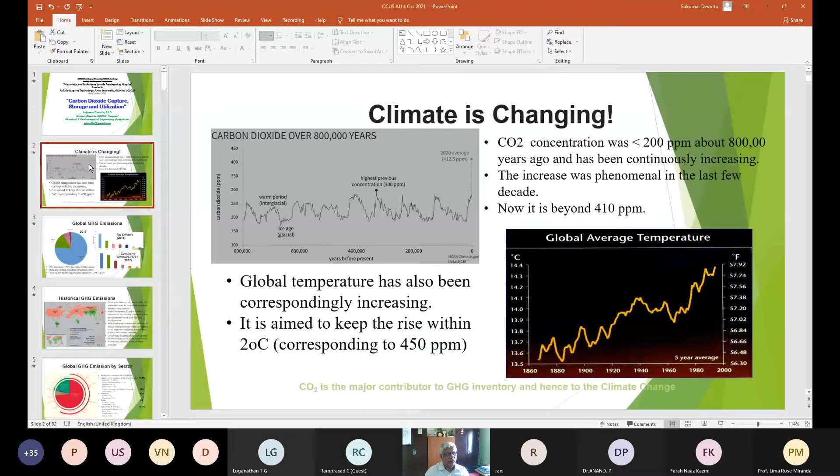Why I chose to speak on carbon dioxide is mainly because of climate change. The climate has been changing in recent times, and people have been wondering what is the reason. If you look at this graph, the carbon dioxide concentration over a few hundreds of thousands of years has been below 300 ppm. But in recent decades, it has been going up. Now it is almost 412 ppm.

People have also measured global average temperature over the decades, and found that the carbon dioxide increase corresponds to the global average temperature. Therefore they have concluded that carbon dioxide is the major reason for the increase in global warming. The world is now struggling to find out how to keep the carbon dioxide rise down so that temperature rise can be kept within 2 degrees Celsius.

If you look at global greenhouse gases, the idea was that carbon dioxide is one of the greenhouse gases, but there are many greenhouse gases. Six of them are the most prominent ones, and they were covered under the Kyoto Protocol: CO2, methane, nitrous oxide, HFC, PFC, and SF6 - that is hydrofluorocarbon, perfluorocarbon, and sulfur hexafluoride.

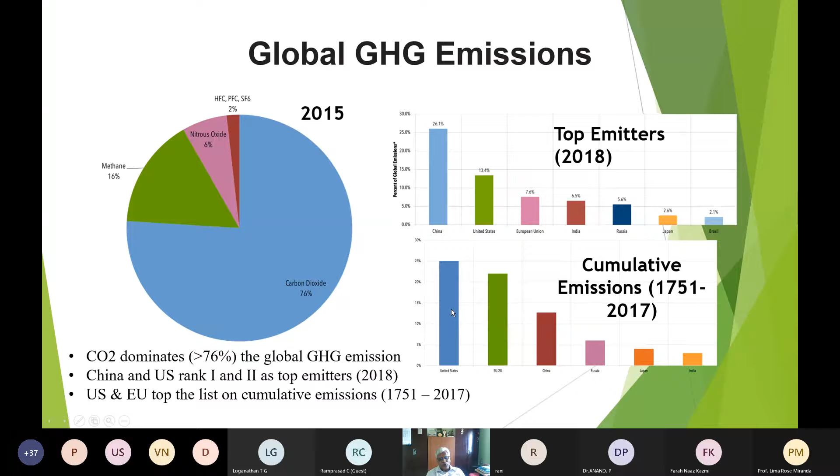But if you take current emission, we are fourth, and China is the leader. So there's a lot of controversy - everybody is saying India and China should reduce emissions, but they are saying, look, we are developing and we should be allowed to emit. This is another plot of global GHG emission, and you can see these are the large emitters who have already developed, while we are developing, and therefore we are arguing that we should be allowed to use the existing carbon space to develop.

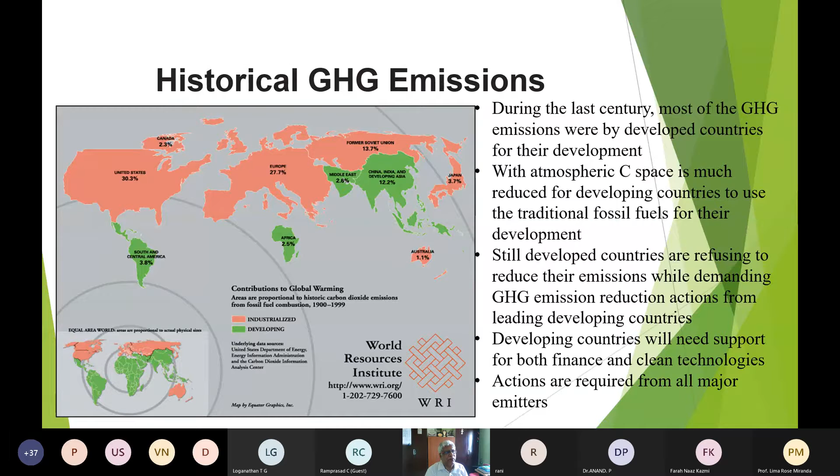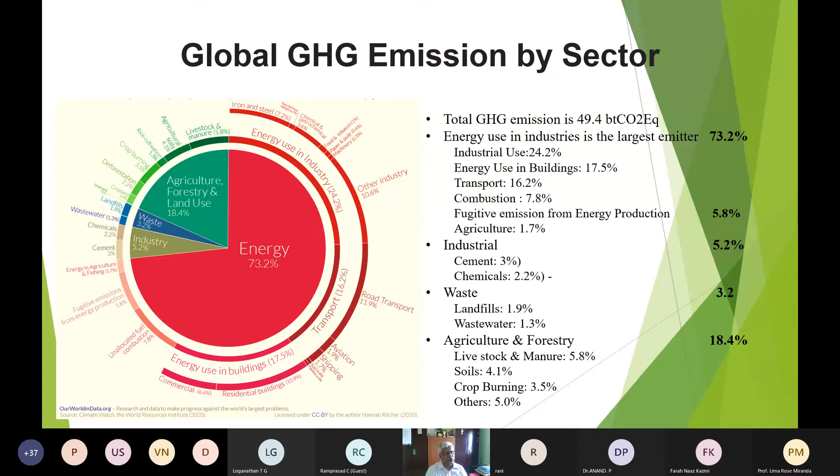And if you look at the sectoral emissions, energy is the major emitter. GHG is emitted mostly by industrial activities, but also agriculture and forestry. Energy use dominates the GHG emission, followed by others, but nothing compares to energy - production, transport, combustion, all come under it. So people are targeting energy and CO2.

There is a Paris Agreement which said we need to act fast because global warming is becoming a very large issue, and if we don't act fast, we will reach a point of no return - meaning we can't save the world, it will become too catastrophic to save. Today, all the rains, floods, droughts that happen are attributed to this climate change, basically CO2. Therefore the world is struggling - can we at least keep the rise to 1.5 degrees Celsius, so that by 2050, if we can reach that target, we can save the world from catastrophic disasters.

The IPCC, of which I was a member, said all these things—that there will be huge floods, because annual rainfall cumulative will be more or less the same, but it will happen in peaks. That means there will be downpour, which we are witnessing. Everywhere downpour is there, landslides are happening because of this.

Therefore, they said we need not just reduce CO2 emission, we have to capture it also, and use it or store it. So this is where capture becomes important.

As I told you, if you take any world energy resource, fossil fuel becomes the major energy resource. You can have electricity, solar, wind, but they still do not form a major contributor to energy. We are increasing its use, but we are still far behind. Oil, coal, gas, all these things are dominating our energy resources, and still, in spite of our best effort, coal dominates. Fossil fuels dominate, and power generation dominates.

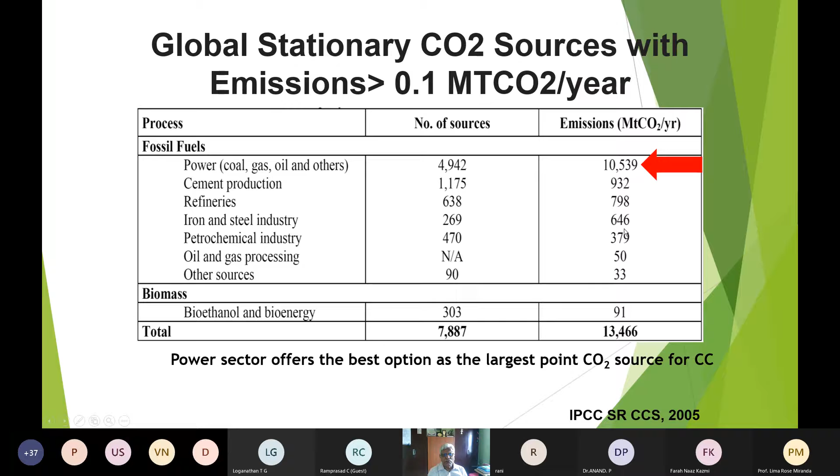So where does the CO2 come from? Mainly, if you look at the table, it's coming from power generation—coal, gas, oil. The emission, 10,000 million tons of CO2, comes from power generation. The rest—cement, refineries, iron and steel, gas processing—they all contribute, but they are all much smaller compared to power.

And if you look at the properties of CO2, it is non-toxic, non-flammable, freely available in the atmosphere, but it's a major contributor to global warming. CO2 is also used as a feedstock for chemicals, to make fuels and other materials.

Therefore, scientists are now looking at whether they can increase the use of CO2 to make value-added products through novel routes, so that CO2 emission can be reduced. But even if you use all major chemicals utilizing CO2, it's not going to make such a big dent in CO2 emission. Therefore, CCS has the highest potential—this is the opinion of some of the best experts in the world, including IPCC.

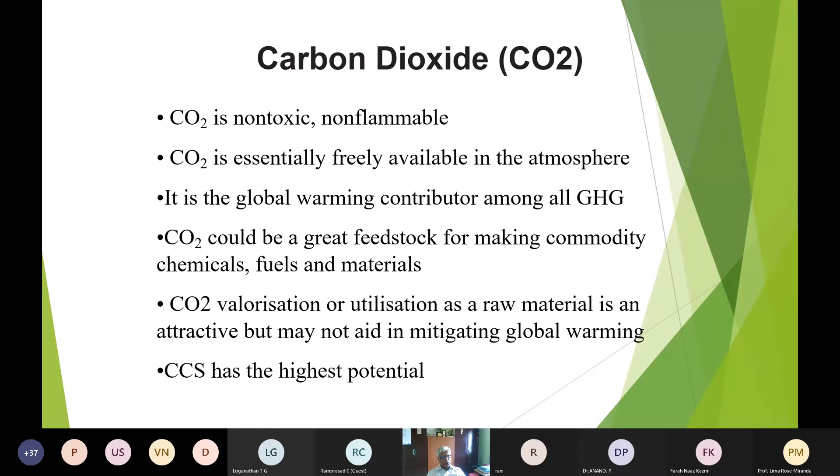So that's where CCS started—carbon capture and sequestration. When I say CCS, I mean carbon capture and storage. When I say CCU, I mean carbon capture and utilization or valorization. CCS became a big topic about 20-30 years ago.

Now scientists believe that CO2 emission is mainly from man-made efforts—they are responsible, it doesn't come much from nature. Like methane comes quite a lot from nature, but CO2 very little.

There are many aspects of CO2 rise which I will not talk about, but I can tell you ocean acidification is one, because the major sink for CO2 is the ocean. With the increase in CO2 concentration, the ocean is absorbing more, and in the process it is becoming acidic because CO2 is acidic. The water is also getting warmer, so it's desorbing more CO2. So there is a process of absorption and desorption—this is very dynamic, depending on where you are, which ocean and things like that.

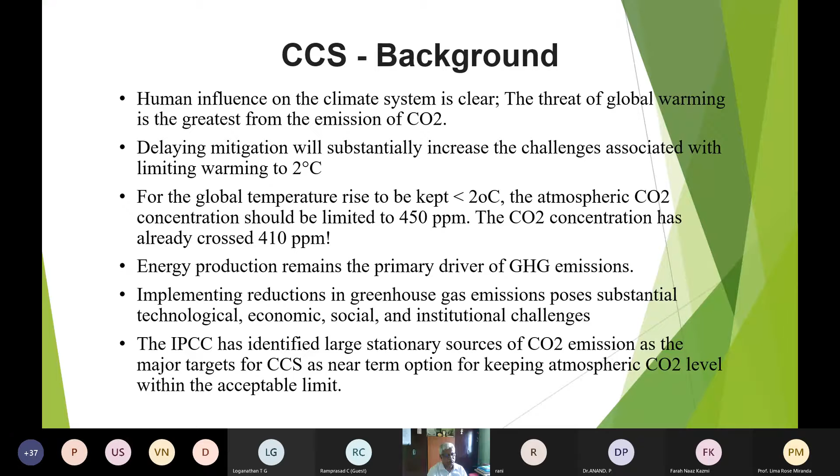But still, it is trying to—if it reaches 450 ppm in the atmosphere, people think that's a point of inflection, meaning we won't be able to stop catastrophe. So IPCC identified CCS as the major approach.

Then, where does India stand on CO2? India also relies mostly on coal for power generation—54% of our power plants are thermal power plants based on coal. So we cannot suddenly shift. That's why today we have a lot of emphasis on solar and wind.

We are expanding—from nowhere we have gone to 11% on solar, 10% on wind, and 12% on hydro, and nuclear is still a small percentage, but it is going on. What is important is coal is the major dominant energy source for India, and it will continue so because we have coal. One of the problems with our coal is high ash content, so thermal power efficiency is rather low.

Otherwise, it's abundantly available for us for next few decades and will continue. But there is a lot of pressure on India to reduce its carbon footprint, and therefore we think that we need to do something about CCS to decarbonize the Indian economy.

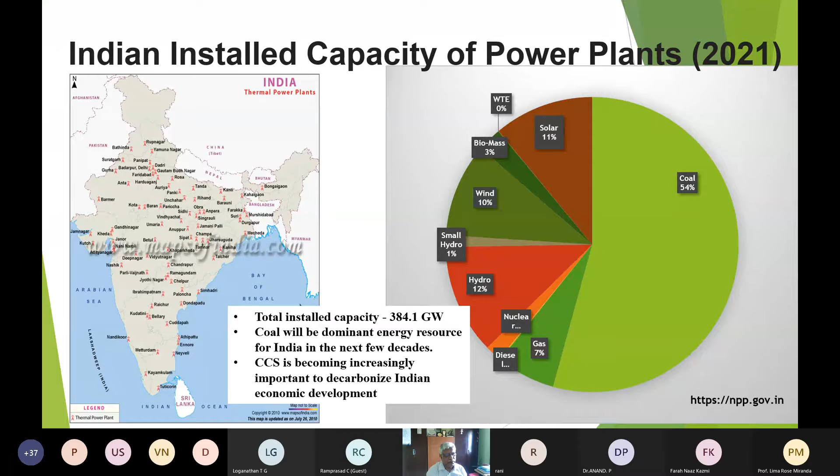Decarbonize means for economy to grow, you will require power. When you need power and you use coal, it becomes too much dependent on carbon dioxide. So the economic growth will be proportional to CO2 emission. So to decarbonize means we need to reduce CO2 carbon coal dependency for our economic growth. That's what we mean by decarbonizing economy.

So carbon capture. What are the options available for carbon capture? Direct air capture - you can capture from air because air contains 412 ppm of carbon dioxide. You can capture using certain adsorption material, adsorbent. But then once you have adsorbed it, you have to desorb it, so you have to use some thermal energy to desorb.

So is it carbon negative? Let me explain what is carbon negative. When you capture 1 kilogram of CO2, if to release this CO2 you have to again use something which will generate 1 kilogram of CO2, your net CO2 captured is 0. Because you have captured 1 kg, but to desorb it, you have released 1 kilogram of CO2. That means what captured is useless. So carbon negative means I should be able to capture 1 kilogram of CO2 and desorb it, and the net should be less than 1 kilogram. Ideally, it should be much less than 1 kilogram, so that I capture and avoid emission, mitigate emission.

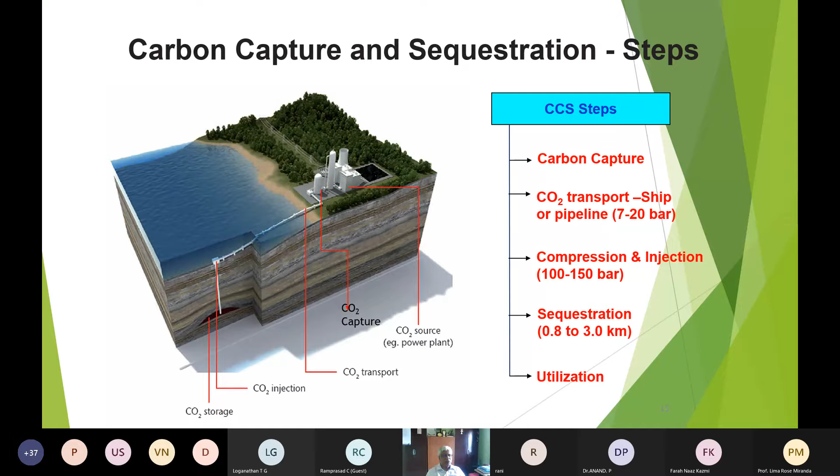There are two ways of looking at CCS: geological and offshore. Geological is terrestrial - you capture it from the plant and send it to different levels, either to a deep saline formation or inject it into enhanced coal bed methane, which is at a reasonable level. Your coal seams are here, and you inject CO2, and CO2 gets adsorbed while methane gets desorbed. So you get enhanced recovery from coal bed methane, which we call enhanced coal bed methane recovery.

Then you have CO2 for oil recovery. When you have oil wells, some oil gets trapped in pores. If you're a chemical engineer, you understand that pores retain oil, and you cannot easily extract it - you have to apply a lot of vacuum to extract oil from pores, and that is a very expensive process. Generally, it's done by injecting water or nitrogen to push the oil trapped in the pores.

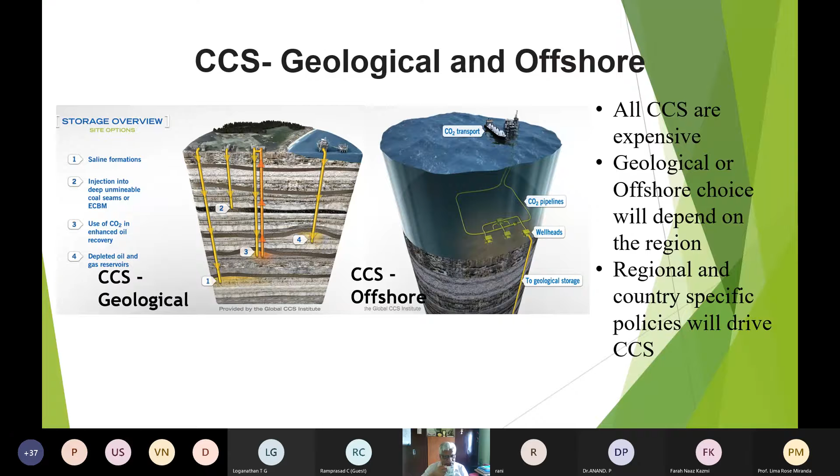So this is geological storage, which I mentioned - you have oil shale, so you can capture CO2, pump it, and then get either enhanced methane or oil. These things have been practiced for quite some time, and there are now quite a few studies being made. In India, we are mostly concentrating on oil recovery and coal bed methane recovery.

But I can tell you, in India, one of the major problems is the concern that these things can have certain geological instability, like we have protests on nuclear and things like that. So there are activists who are not happy with any subterranean activities, saying that this is going to upset the geological terrains, and it can result in a catastrophe, or degrade land, or deplete water resources.

There are certain truths to some of these, but not all. Traditionally they use high pressure water to get coal bed methane or enhanced oil, but that results in a lot of water usage and pollution. But with CO2 that doesn't happen. But people still don't believe that CO2 is a safe thing, and you get into a lot of controversies on topics like CCS, enhanced oil recovery, enhanced gas recovery.

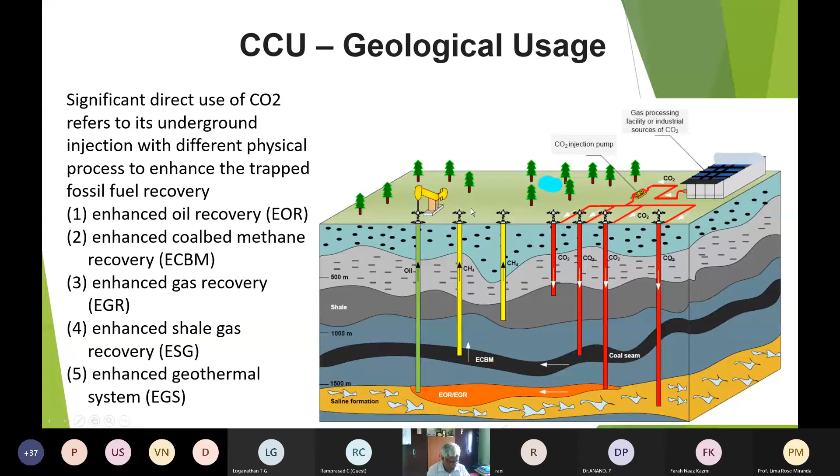So this is oil recovery. This is explaining to you because oil is at a reasonable depth.

Did you say something? Yeah.

Okay, so this is 1 kilometer depth, and you get oil recovery.

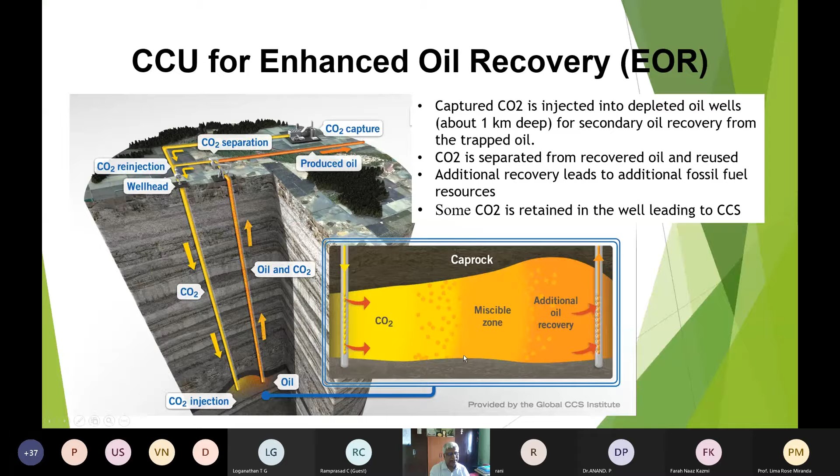Now, when I say utilization, then capture comes in a different way. In chemical engineering terms, capture comes in different ways. I can capture CO2 post combustion, meaning I burn fuel for some use, produce power and heat, capture CO2, and then compress that CO2 for some use. Or pre-combustion, meaning I use fuel and a reformer, which utilizes CO2, then produce power. So it's a kind of indirect utilization of CO2.

And there is IGCC, integrated gasification combined cycle for power generation. So you get CO2 capture, power, chemicals, everything coming in one shot. So ultimately CO2 can be compressed and used.

Oxy-fuel is different in the sense we can burn any fossil fuel using pure oxygen instead of air. Air has only about 21% oxygen. If I separate air using air separation and produce more or less pure oxygen, then use that to burn fuel, I get a high concentration of CO2. Normally I may get 12% with coal or 4% with methane or natural gas, whereas if I use pure oxygen, which I get through the expensive process of air separation via air liquefaction, and then burn coal or gas with it, there is no nitrogen in that stream. I get pure, very rich CO2, so it becomes easy for me to capture and compress.

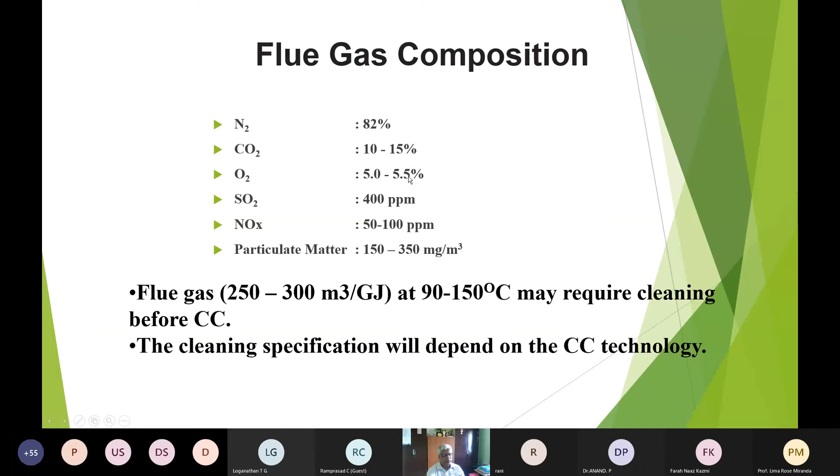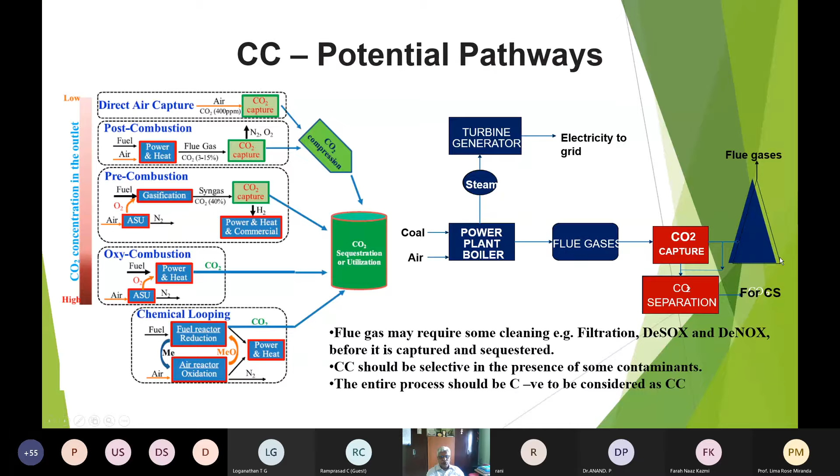Now let's see what I do. I told you one method is direct air capture, which I will explain very soon. Post-combustion is the most common method. Then pre-combustion, like oxy-fuel or oxy-combustion. Then we have chemical looping, a chemical engineering technique using metal oxides. You take the flue gas, capture it, separate it, and the CO2-lean gases can be left out, then you use the CO2 for sequestration or use.

What all can you make with CO2? You'd be surprised, you can make loads of items using CO2. It's used even today. For instance, we use carbonated beverages—if you're buying Coke, soda, and similar drinks—that uses CO2, but that requires food grade CO2. You can't just capture it from flue gas and use it directly.

Then there's extraction of flavors and caffeine, which again needs food grade, very pure supercritical CO2—like chili extract is known to be made using supercritical extraction, along with rose and other extracts. You can make sodium carbonate and bicarbonate using CO2, which we do now. If you're making urea, CO2 is one of the major raw materials; you can also make methanol, so you get fertilizers. CO2 is used in refrigeration, particularly in the supercritical cycle. With all the issues around global warming and ozone layer depletion, CO2 as a refrigerant is increasing, though its quantity used is still much lower, but it's still used.

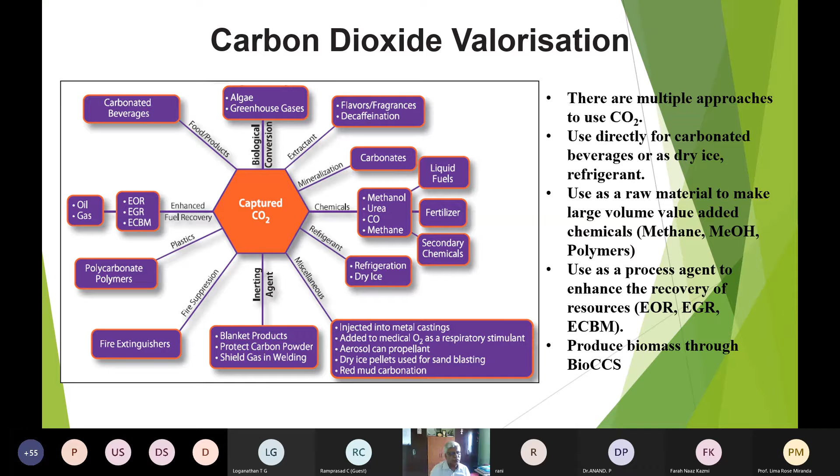You can also capture CO2 through biological conversion—we call it the algal process—and that captures CO2, which I'll mention later. So there's a lot of activity around the world looking into CO2 conversion to formic acid, methanol, and other chemical production, as well as sodium bicarbonate.

So you can make organic chemicals, inorganic chemicals, use it as a solvent, and it's very inert, very safe, except that most applications are by supercritical CO2. Even in a refrigeration cycle, people are using CO2 in car cooling or truck cooling, and that pressure is about 120 bar. You can imagine, usually currently a truck air conditioner will not operate beyond 25 bar.

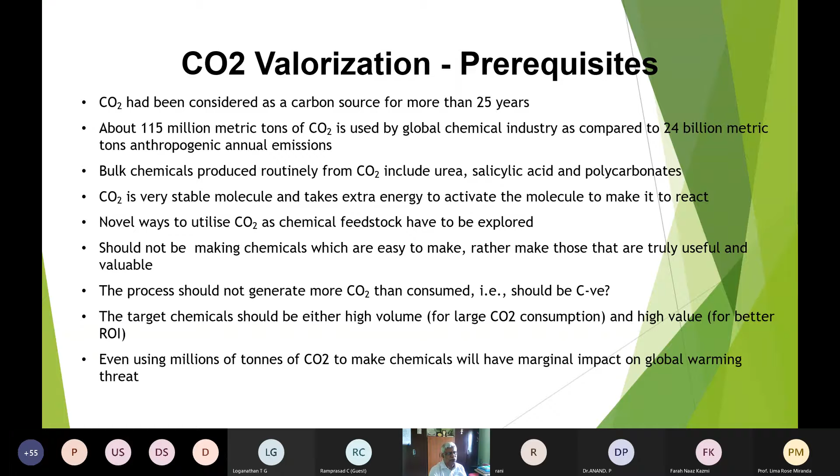Now you need a very high pressure system, but the tube is thick walled, so it's not an issue. Still, the pressure is 120 to 140 bar. So on one side we are talking about CCS, on the other side we are saying we should be talking about valorization. There is a huge activity going on, including in India, on valorization. We are not much into capture and storage, but we are doing a lot on valorization, including DST. I was the chairman of the committee for CCU in India for 3 years, and we introduced a lot of new projects on CO2 utilization.

See, one such thing is you can use CO2 to make methane. That means CO2 to C1 chemistry. It's called CO2 to C1. Now this is fairly well established. Now people are talking about higher alkane series, not just C1, but C3, C4.

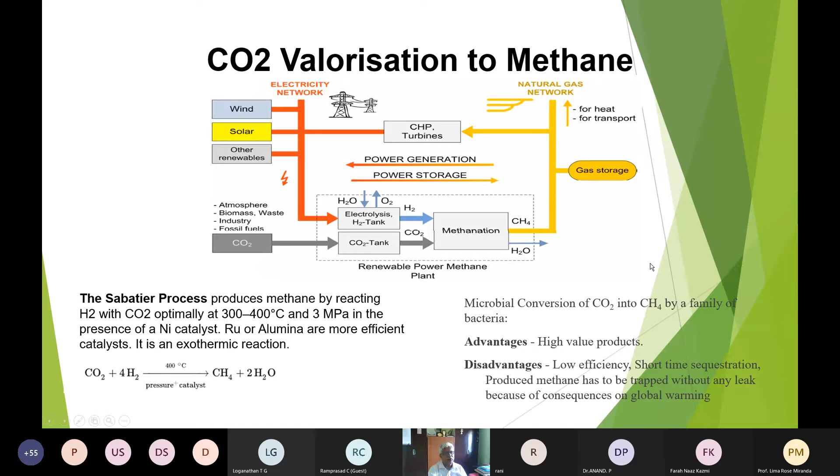So DST has sponsored a project in which I am a monitoring committee member. We are now trying to push for higher, C4, butane, propane, butane kind of things, so you have higher value. These projects are going on, and they are mostly catalytic processes. But you can also do this by biochemical process, microbial conversion of CO2 to methane. But most of the processes are catalytic.

What are the various options of capture in chemical engineering? All these things involve unit processes: absorption, adsorption, chilled ammonia absorption, mineral carbonation, chemical looping, membrane separation, biological, agroforestry. We have discussed agroforestry, so I will not touch much on that. I will quickly go through various options.

Absorption, CO2 absorption by monoethanolamine has been going on for decades in the fertilizer industry, in urea production. CO2 is the raw material, and when you convert CO2, the unconverted CO2 is captured and absorbed by chemisorption using MEA. MEA is a solvent which is very popular. So in any demonstration project today for sequestration, geological sequestration, they straight away use MEA to absorb, capture, and then store it.

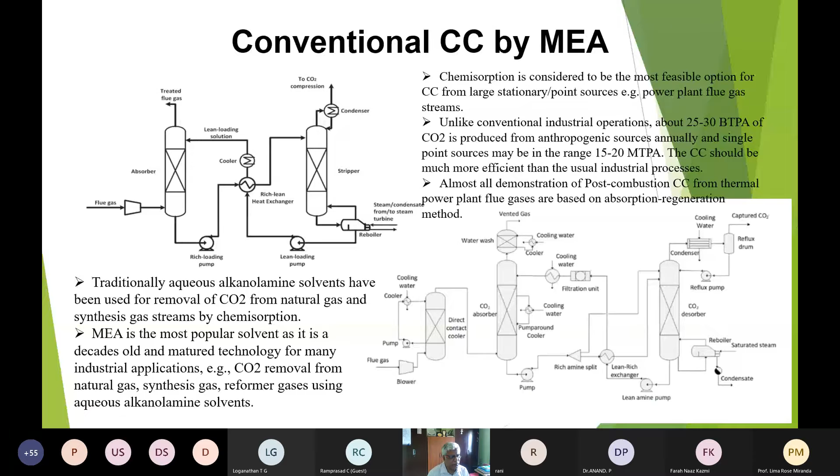But there are many disadvantages with MEA. It's very well established; if you want to capture immediately without difficulty, I will go for MEA. But it is not carbon negative. It also has certain issues with impurities like oxygen, it can cause corrosion and solvent degradation. MEA gets degraded, even moisture is an issue with MEA. Particulates will interfere, and SO2 will react with MEA. Therefore, you will have to take care of SO2 first, clean it, clean the flue gas, remove all particulates, and remove moisture before you use amines to capture from flue gas.

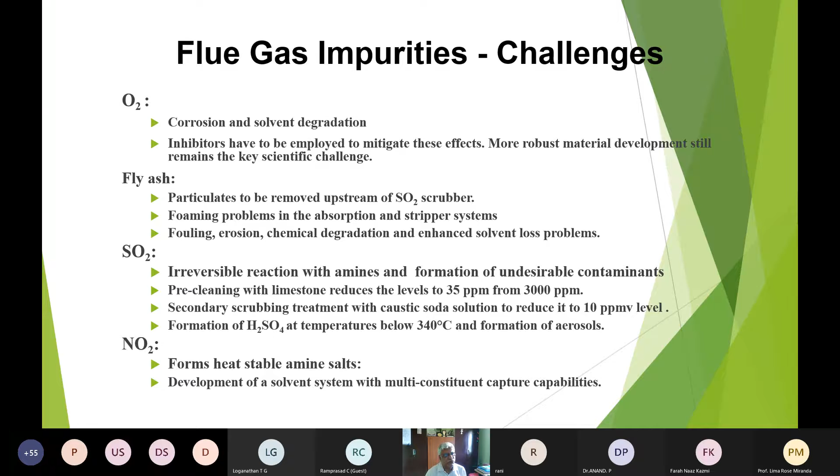The major problem is MEA gets degraded, so you have to regenerate MEA and make up MEA in a cycle, because it requires a fairly high regeneration capacity. It has a high absorption capacity, meaning I can absorb a lot of CO2 using 1 kilogram of MEA, but it requires reasonably high desorption energy, so it's a problem. And if the concentration goes down, it becomes more of a problem. Like in direct air capture, it's an issue; in a power plant with 12 to 14% concentration, it may be attractive.

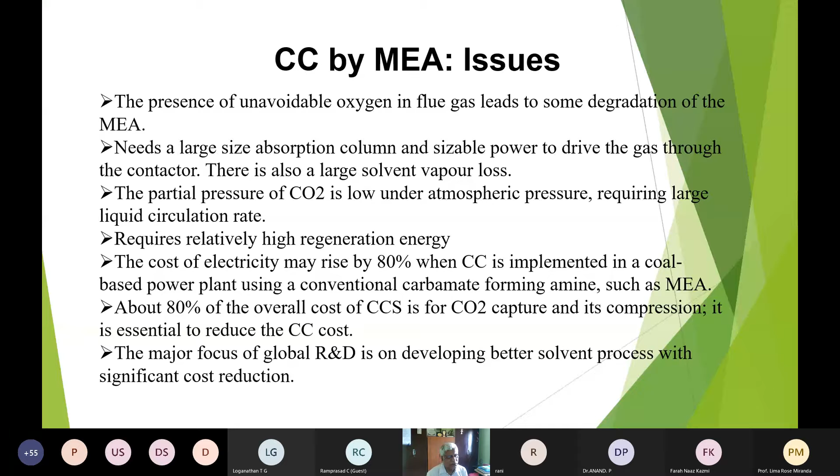And then there are processes for electrochemical regeneration of amine that will make the process more energy-wise attractive, because the carbon dioxide rich amine stream can be regenerated using an electrochemical process, and then you reuse the amine solution for carbon capture. These are being explored, but it's not commercial yet. Usually they regenerate by using thermal desorption.

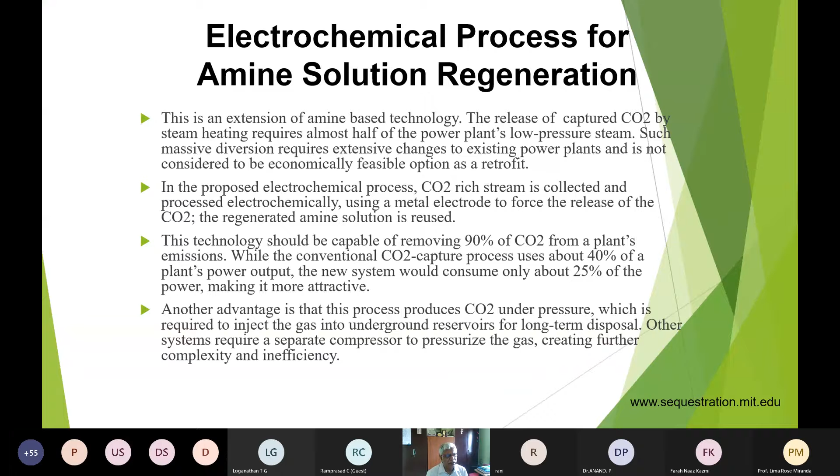Absorption is still the best option available. In unit operations for carbon capture, absorption is the best option, and amines are the most popular. But as I said, MEA has only one NH2, so it is a problem, though its kinetics is very fast. It can absorb very quickly, but you have the problem of one NH2. It's a carbamate reaction between CO2 and NH2.

So now people are trying to avoid monoethanolamine, moving to secondary amines, tertiary amines, and hindered amines. That means when you go to secondary amines, it has 2 NH2, 2 arms. If you go to tertiary, it has 3 arms to capture CO2. In multiple hindered amines, you get multiple arms.

That means you can sequester, capture much more CO2 per kilogram of solvent, but their kinetics is not as fast as monoethanolamine (MEA). So you have a problem: on one side, MEA is very cheap and an extremely well known process, but these other amines are not as well known, although they have a high capacity.

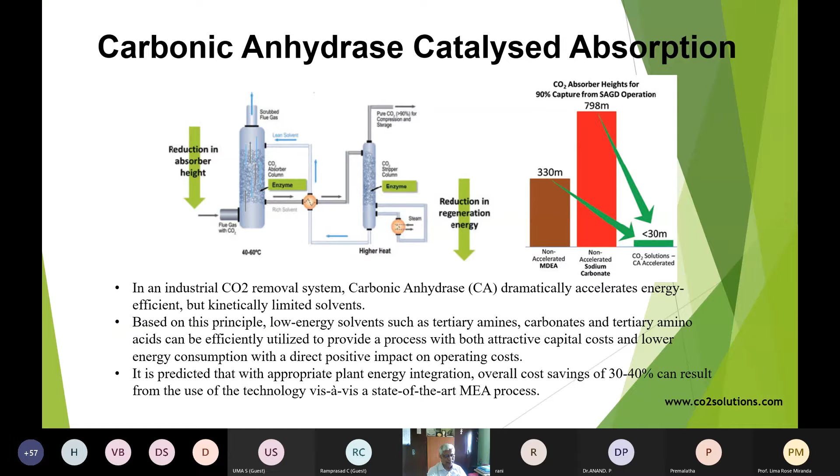So you have carbonic anhydrase as an activator on an adsorbent like zeolite. The zeolite makes the CO2 pore passage very easy, so you are able to capture CO2 much more quickly, and it increases the adsorption capacity.

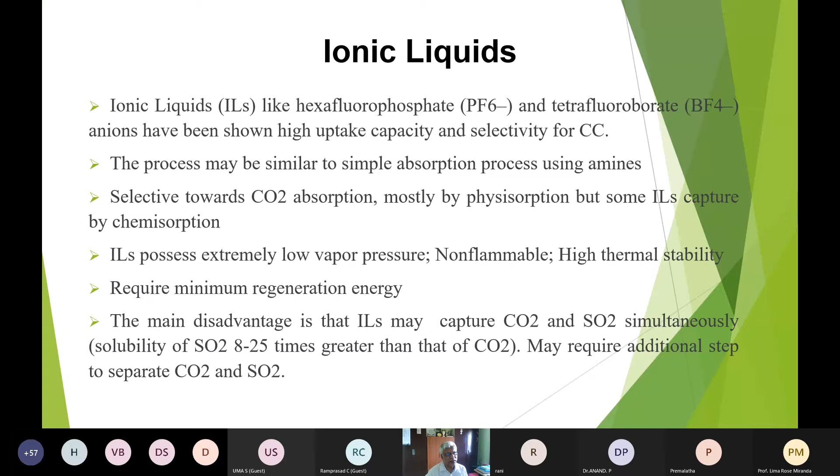People are looking at ionic liquids. There are proprietary ionic liquids available, like PF6 and BF4, being used now for selective carbon dioxide capture. Capacity is pretty high, but it's not always chemisorption—there are some ionic liquids for either physisorption or chemisorption. Ionic liquids are non-flammable and highly stable, but expensive, so recycling is an issue, and they are also sensitive to components like SOx. You need to make sure SO2 is not in the flue gas if using ionic liquids. But this is still in R&D, with no commercial use yet.

Adsorption is very much in commercial use because we use it in many techniques like pressure swing, temperature swing, or electric swing. It's still not very attractive because you need a lot of energy, and the capacity to adsorb is pretty low in spite of a lot of developments in adsorbents. As I keep saying, absorption is the most popular, but next to that is adsorption.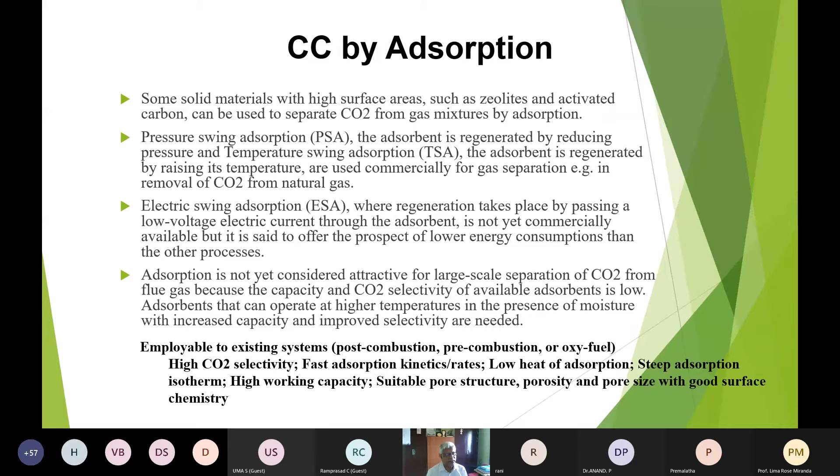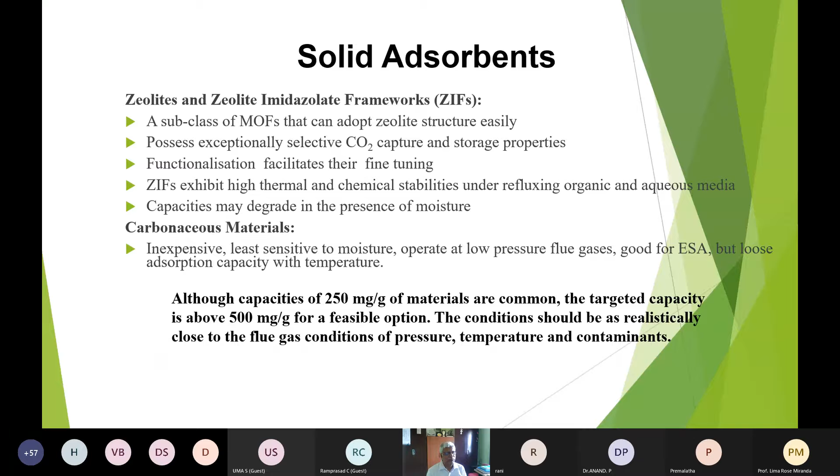There are some commercial units available now—I'll show you one such unit. Zeolite, surface modified zeolites, and metal organic frameworks are all used in adsorption techniques. One of the problems for metal organic frameworks is moisture, because the moment you have moisture, the metal organic framework can collapse. So you have to make sure the flue gas is free from moisture.

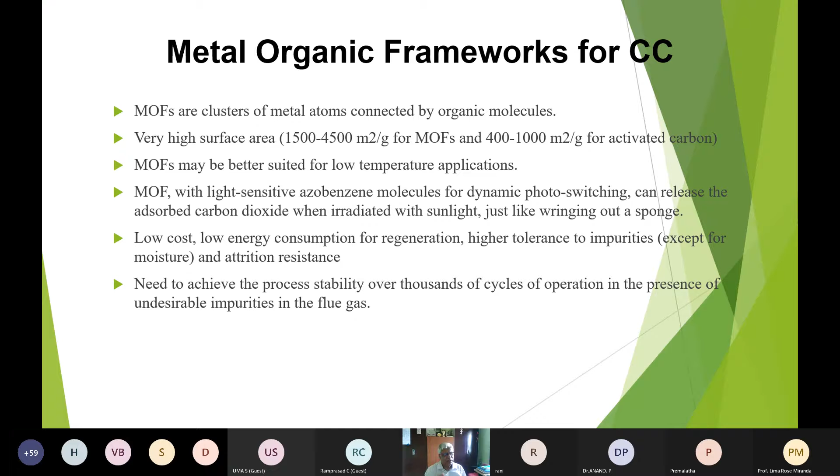As I told you, metal organic framework is very good in terms of capacity because it has a very high surface area, like a football ground in a small MOF. But there are certain issues related to impurities. There are very good developments though - people are saying you can desorb using sunlight, which is great. I don't need to supply heat, just use the adsorbed MOF in sun and it can desorb. So that means I have to capture it in a cage and then desorb it.

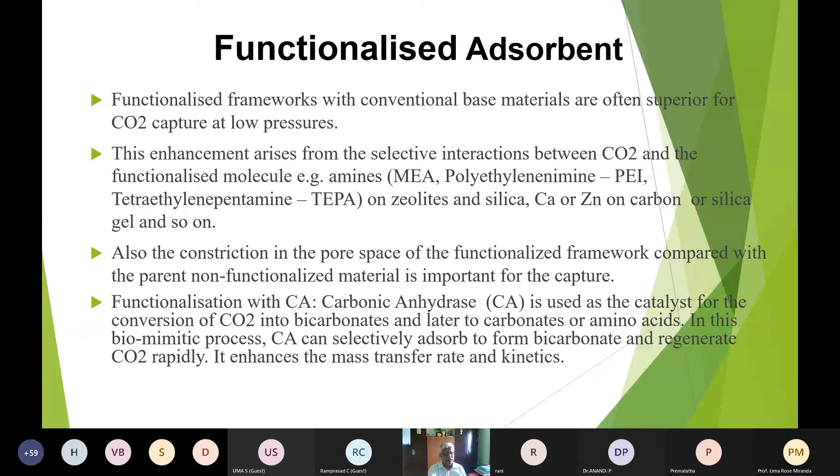Functionalized adsorbents are there too - we use amines to functionalize zeolites, and then use carbonic anhydrase to further enhance the formation of carbon capture. You can also separate CO2 by membrane, and these are being tried even in India.

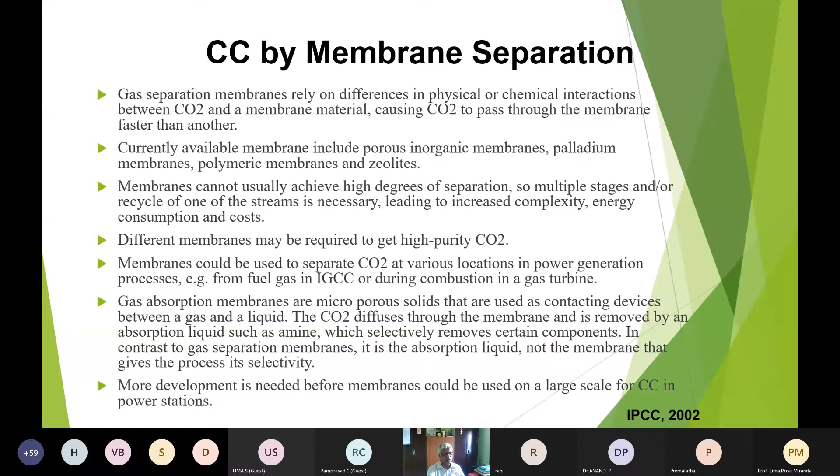You use membrane to separate CO2 from flue gas, but it has to be free from particulates because otherwise the membrane gets clogged. There are many membranes available - ceramic, polymeric membrane is most popular, but you also have ceramic membranes, liquid supported membranes, and molecular sieves. Many membranes, even proprietary membranes, are available.

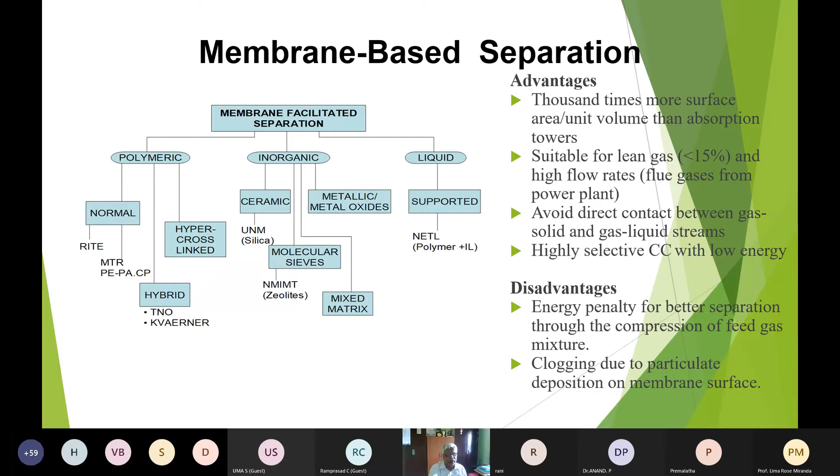BHEL tried to develop a membrane to capture CO2. This is a membrane contactor - the membrane is treated with amines, so it captures CO2, then you separate it and desorb it, and the cycle goes on. So there are ways of using membrane as a separator, like we do in water, or you use it as a membrane reactor to capture CO2.

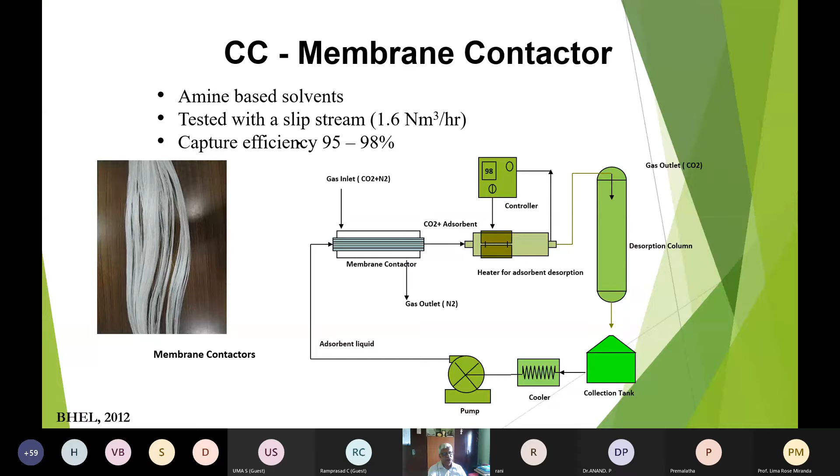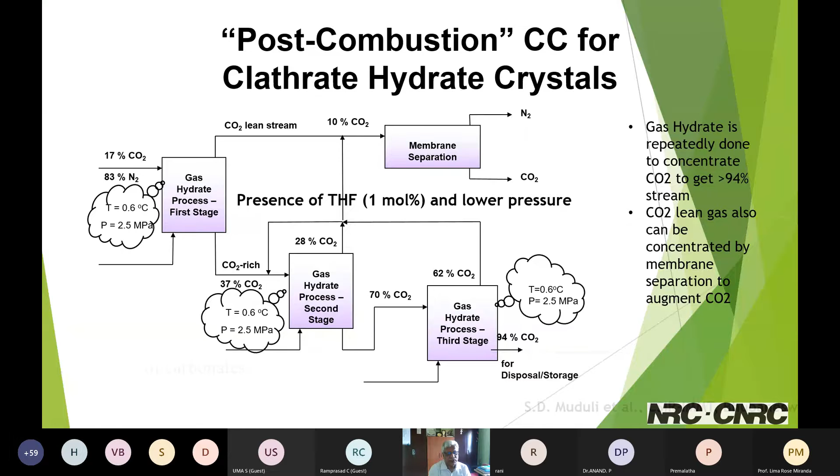Mineral carbonation is a natural process which occurs in the ocean, but it's a very slow process - kinetics is extremely slow. You have a metal oxide, and CO2 dissolved in ocean gives metal carbonate, and that's how you get stones and pearls. In all the minerals in the sea, these things are formed - rocks are formed in the seabed at very high pressure and low temperature, with carbon dioxide dissolved there.

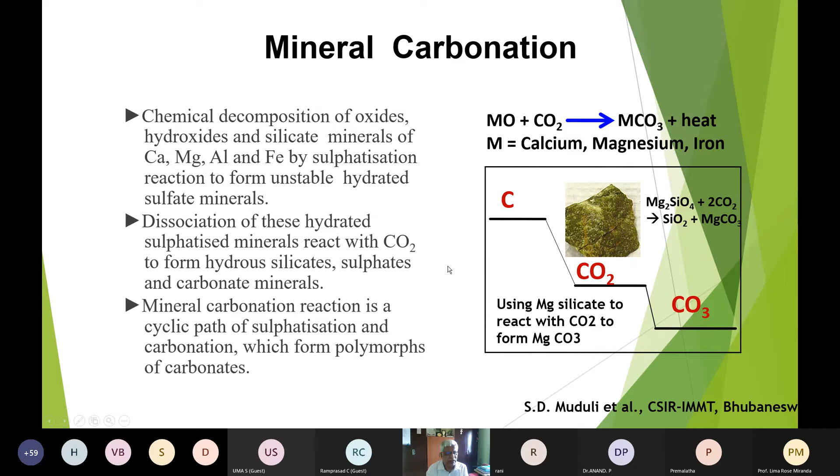Can we mimic that? People are trying to mimic this - it's a very difficult process, but it is being pursued. We can sequester CO2 using waste minerals. If I have red mud from the aluminum process, that's very basic - it has a lot of NaOH in the red mud. So you can use that waste material to capture CO2. Capturing CO2 using mineralization of red mud is one such technique.

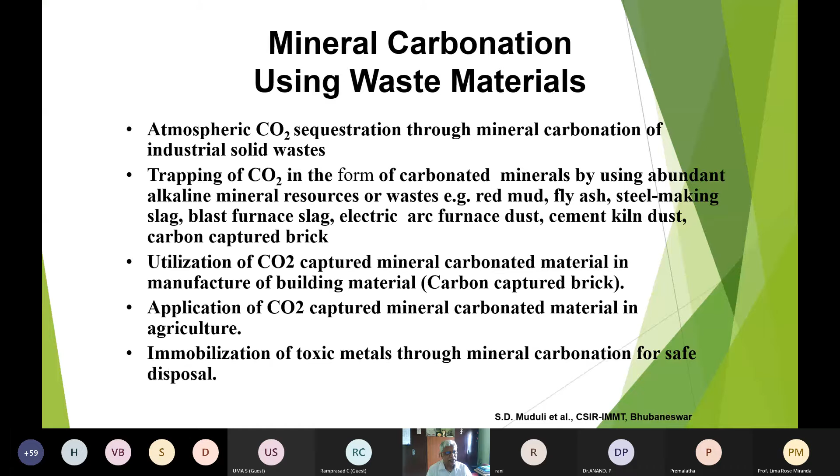You can use blast furnace slag too - all these things have a capacity to absorb, react, and form minerals, and this is being tried.

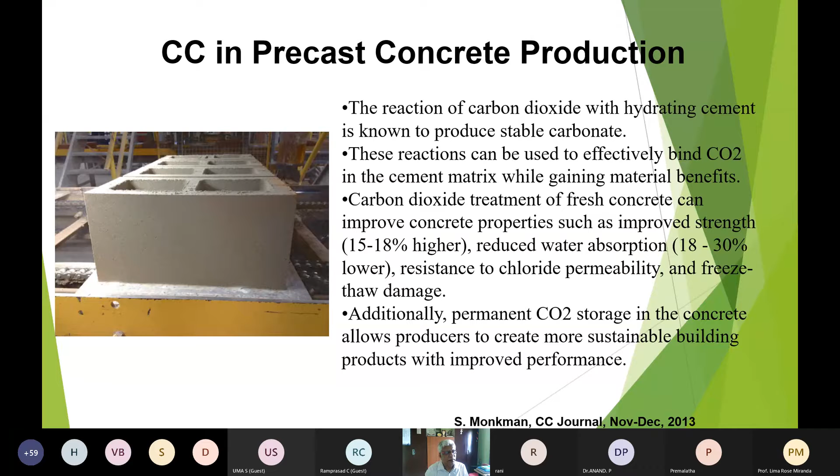Even cement is being tried - people are now trying to promote cement as a carbon capture material. Because cement has a slow curing process, it keeps on capturing CO2. When the cement matrix is finally cured, it would have captured and retained CO2 - capturing means it won't dissolve, it's retained. So this is another area where people are looking at cement as a carbon capture material.

I told you about pre-combustion and post-combustion. When you have air separation and then combust it, you call it pre-combustion. You need pure oxygen to do pre-combustion capture and get very pure output. Post-combustion is what we are mostly talking about, and it is very popular. Now, oxy-firing is pre-combustion: you use an air separation unit to produce pure oxygen, burn fuel, and produce water.

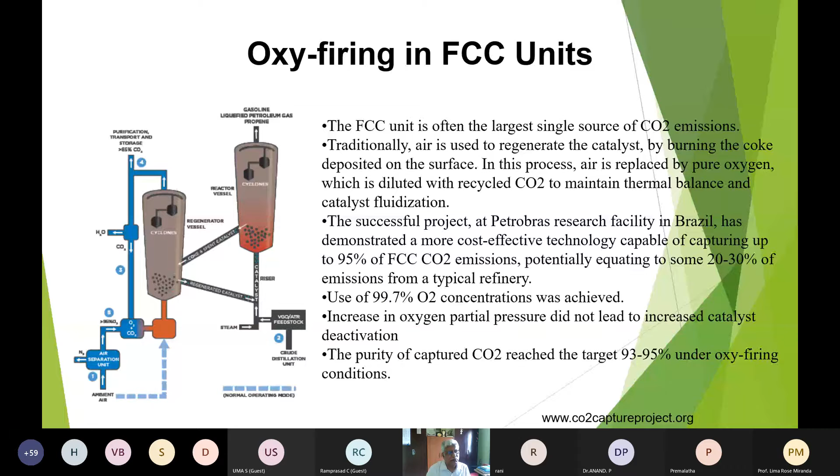You can use this even at cat cracking, meaning you use pure oxygen instead of air, and get a very high percentage of CO2 for capture. These are the techniques used when looking at a single point source. Now you get 95% capture. Power plants will produce only about 12% CO2 maximum, some give 14%, but with these techniques you get about 95% CO2, so you can capture CO2 much more easily.

Chemical looping is an interesting concept, very similar to chemical engineering processes. I use a metal oxide in an air reactor, and that metal oxide is oxidized. Then I use a fuel reactor, in which I burn fuel including coal, but the oxygen for that is released by the metal oxide, which then gets reduced and goes back to the air reactor. So I can take Fe2O3, oxidize it to Fe3O4, use it in the fuel reactor to burn carbon, then it gets reduced back to Fe2O3 and is recycled to the air reactor. This process is known as chemical looping technology.

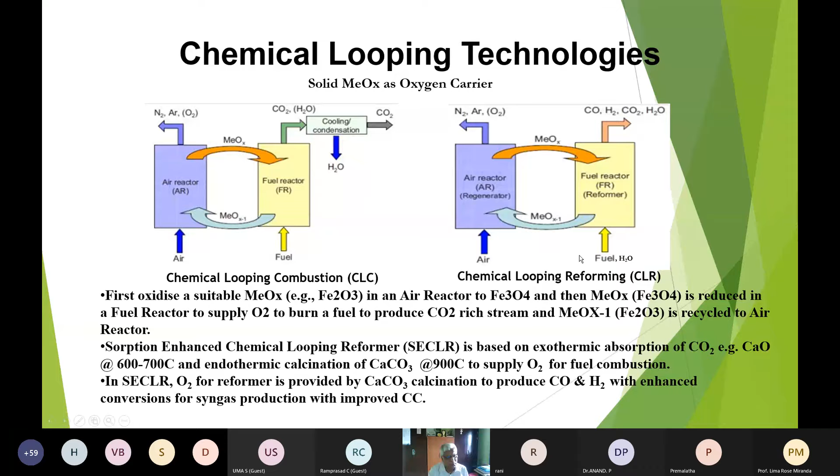Similarly you can use this for reformers, because you are getting CO2 and can supply oxygen, so reformation takes place in the loop reactor. The simple technique is using metal oxide to supply oxygen. Pilot plants have been set up for this, but all these things are still in R&D stages.

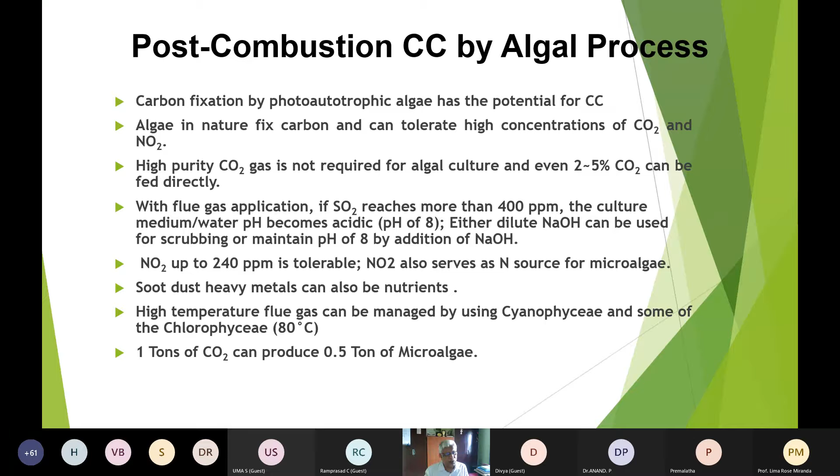The algal process is one of the best. You capture CO2 using algae, and the beauty of this process is that you can capture CO2 and produce biomass. If you choose appropriate conditions and algal culture, you can produce biomass with high lipid content. You can dry this and use it as fuel, so it has multiple benefits: you are capturing CO2, producing biomass which can be used for many purposes including nutraceuticals, and it can also be used as fuel.

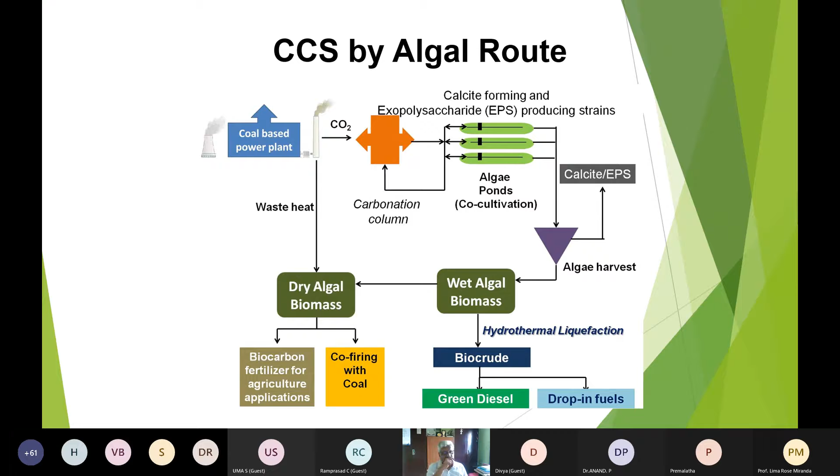There are many pathways for capture, but I will show you one that people have used. This is a very interesting process being done in Cuddalore, Nellikuppam, where distillery effluent is used, because for biomass you need water with certain nutrients. Distillery effluent has a lot of nutrients in it, and otherwise you would have to treat it using standard techniques. But now I can use it to capture CO2, produce biomass, and then use it as fuel.

We do this in what is known as a raceway pond, which is just a zigzag path. First you mix your exhaust, the distillery effluent, with CO2, and then introduce it into the pond. Because of the photochemical reaction, biomass grows, and then you harvest the biomass. You can see the biomass being harvested, so it has multiple benefits.

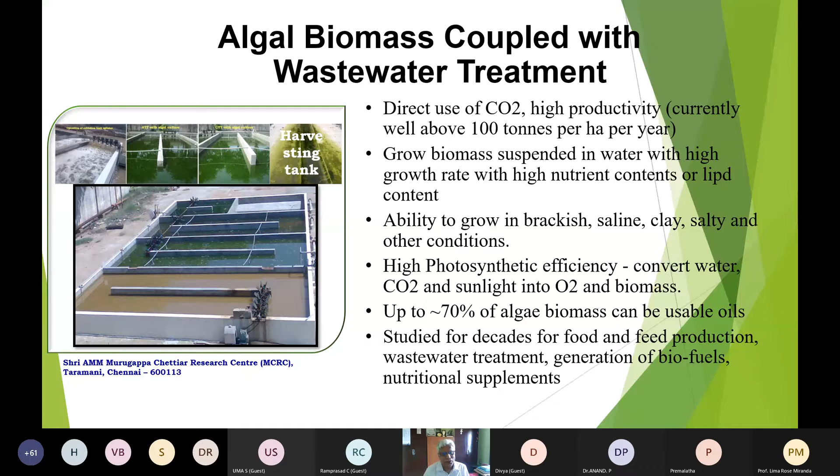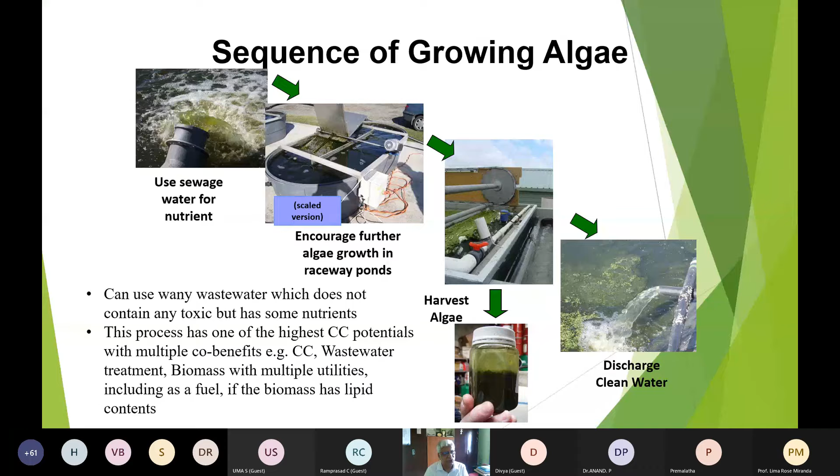I told you, you're capturing CO2 and producing biomass. If you do it properly, you can produce fuel. These processes are being done commercially now. In fact, we are trying to set up one plant. There are 2-3 groups in Tamil Nadu itself, including the EID Parry industrial demonstration unit, and I'm involved in one of them. I feel this is the best approach in terms of carbon capture and sequestration because of the co-benefits.

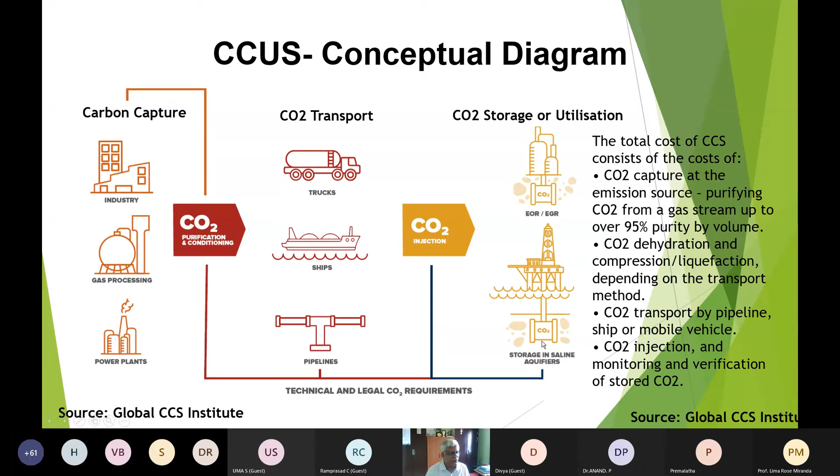The capture is very important. I'm coming to the end, but I'm only going to talk about capture globally now. What are the global activities on capture? Once you capture it, you have to transport it by trucks, ships, or pipelines. Then you can either store it, use it for enhanced recovery, or use it for some chemical process.

See, this is compression. You can't just capture it, you have to compress it. And people were spending huge money to compress it. Just look at this cost - it's about $100 per ton of CO2.

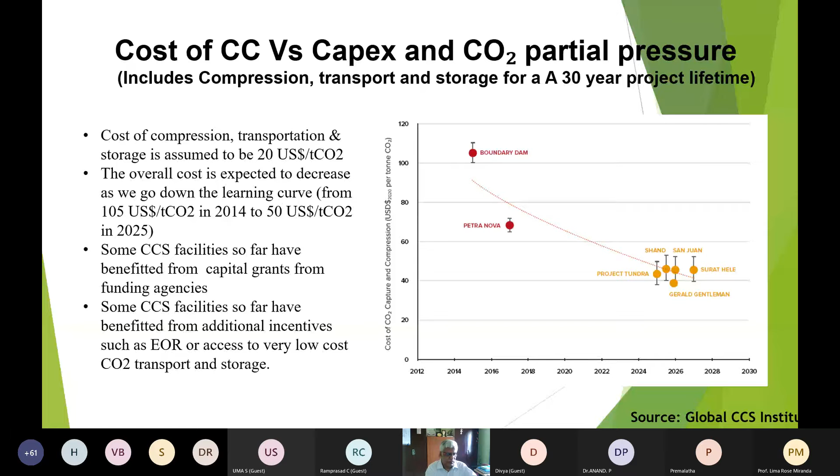Now people have learned quite a lot on the learning curve, and the cost has been brought down to some $40-45 per ton. But even now there are units operating with much higher values. So capture is one, then transport compression is second.

Then there's monitoring and verification. By international rule, you cannot just put it underground and say I've done it. No, there's a possibility of CO2 leaking. Therefore you have to continue to monitor for 30 years - that's the rule now. So that puts some cost on it, but that's not a big cost.

This is a global map of what is happening around the world - how much CO2 is being captured and stored, and the potential. This map shows how much potential we have in the world to capture and store. You'll find that most of the potential is in North America and China, and a little bit in Australia and Europe. We have much lower potential, and there are certain countries where we have no data. But globally there's a lot of potential.

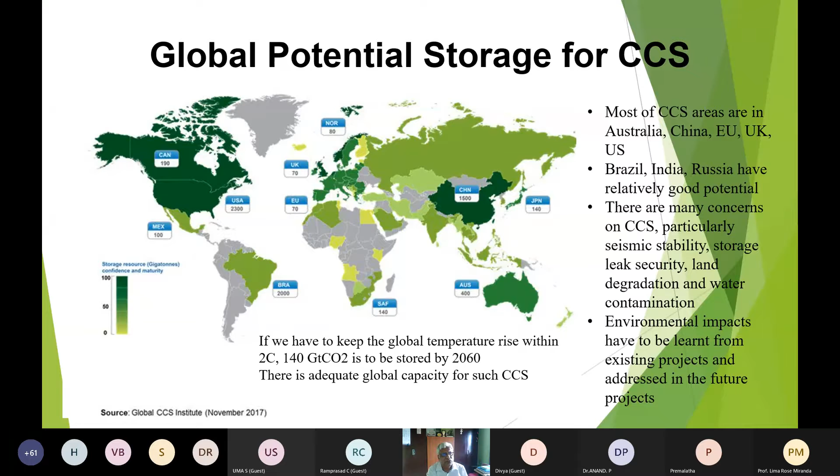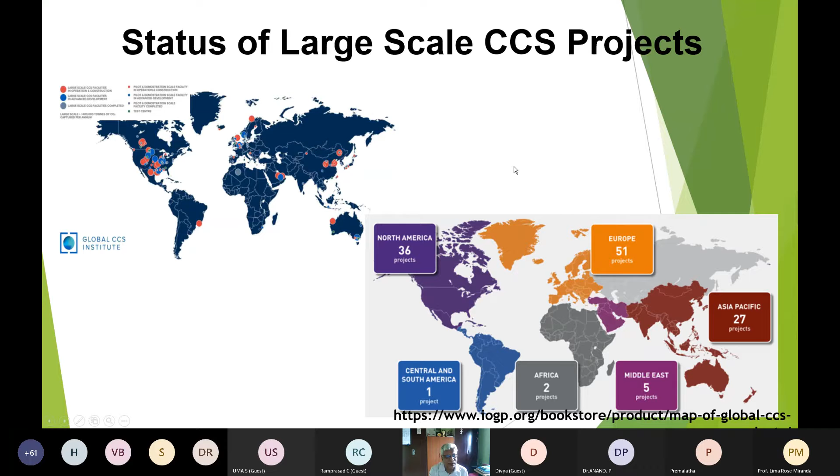Large-scale CCS projects - there are many projects around the world on capture and storage. But you'll find that not much is happening in India because we are not still moving in the storage area, because of political reasons.

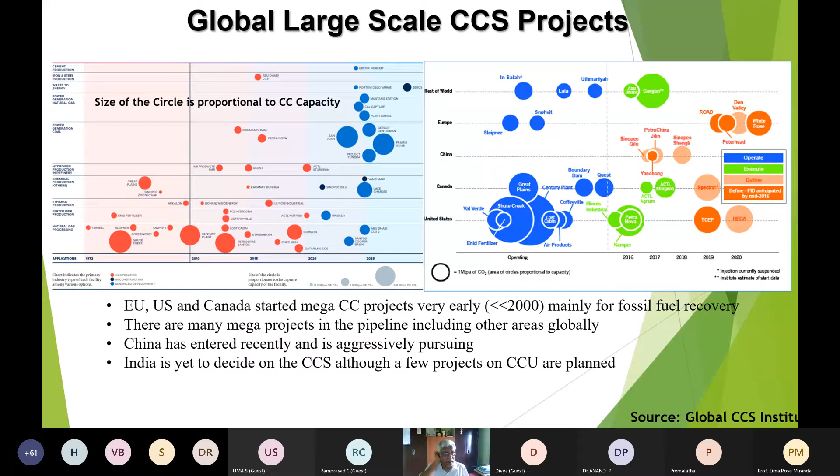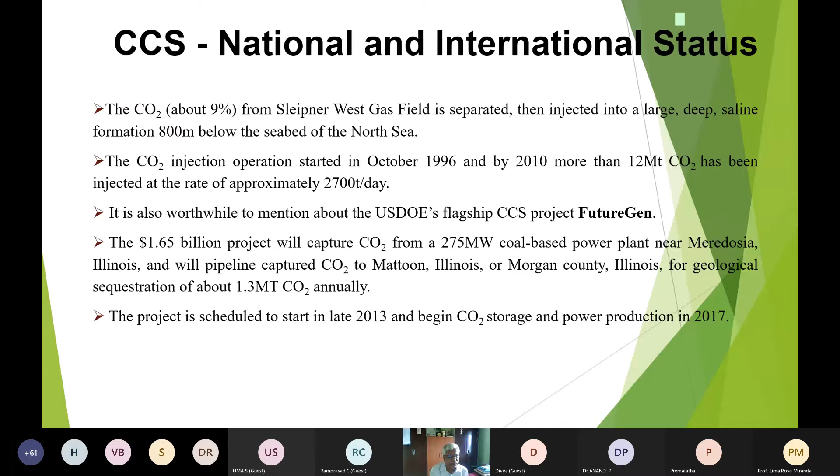Europe, particularly Northern Europe like Scandinavian countries, because of their oil activities, are very aggressive on enhanced oil recovery, enhanced gas recovery, and things like that. A lot of things are happening in the world on CO2 capture and injection, but we are only now interested.

There are private players in the game, introducing proprietary amines for selling it. So in India now, Chennai Tuticorin has a power post-combustion project that uses a proprietary solvent to capture. Tuticorin Alkali Chemicals and Fertilizers has a plant that uses one such proprietary solvent for post-combustion, but they use it for making sodium bicarbonate.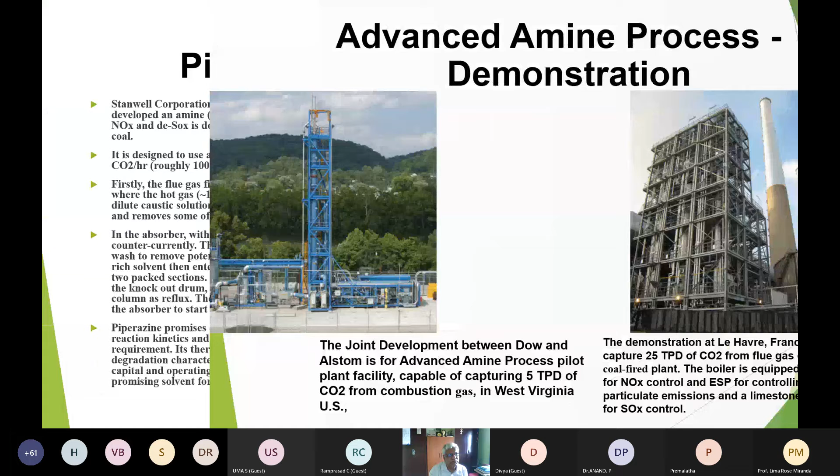So there are many plants with this. All these things use mostly amine-based solvents.

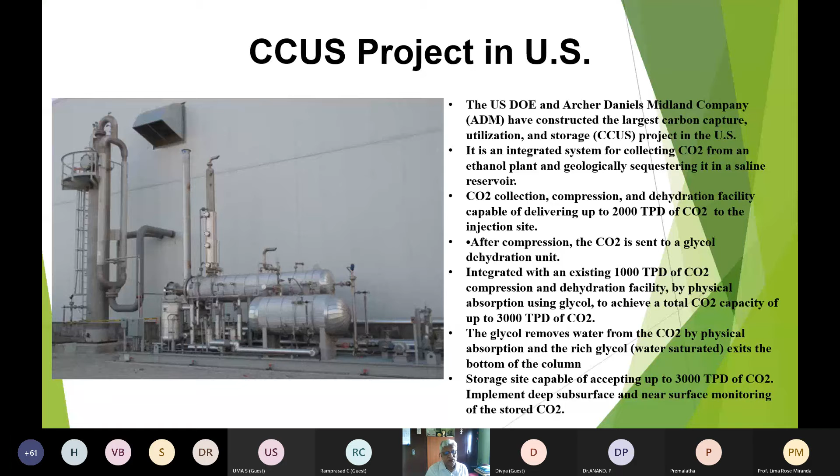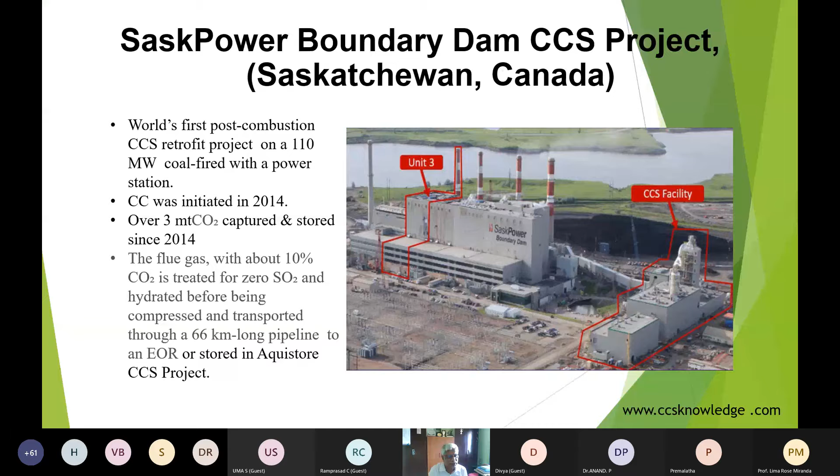Canada is very active. They have some of the largest plants - the world's first post-combustion capture. The largest plant was put up at SaskPower in Boundary, known as the Boundary Dam project. The same company is doing it in 3 places, and they're all post-combustion projects. There are also many such projects in Canada.

We have mostly enhanced oil recovery, biological sequestration, but very little on geological sequestration, although we are studying it. Geological sequestration is mainly related to oil recovery. IIT Bombay is one of the centers, and ONGC, Reliance, they're all looking at enhanced oil recovery and enhanced gas recovery. There are many projects, Indian Oil too, but I don't get much open data. Although I am involved in national committees, they don't share it - Reliance, Indian Oil, they keep it to themselves, so we don't know what's the level of progress.

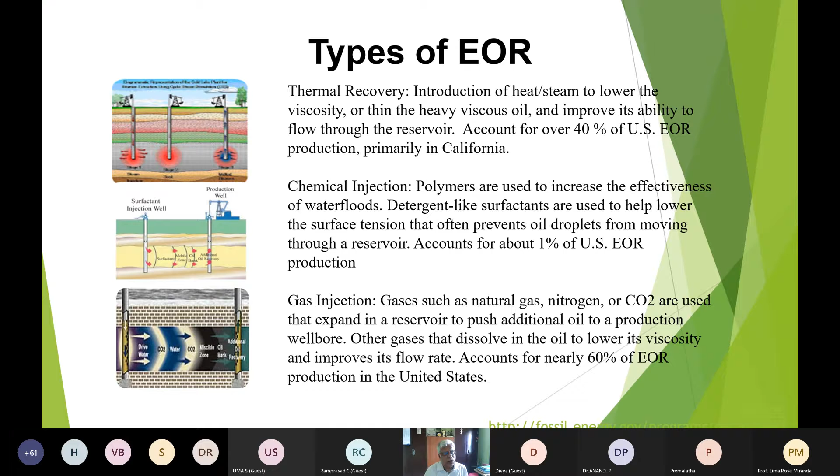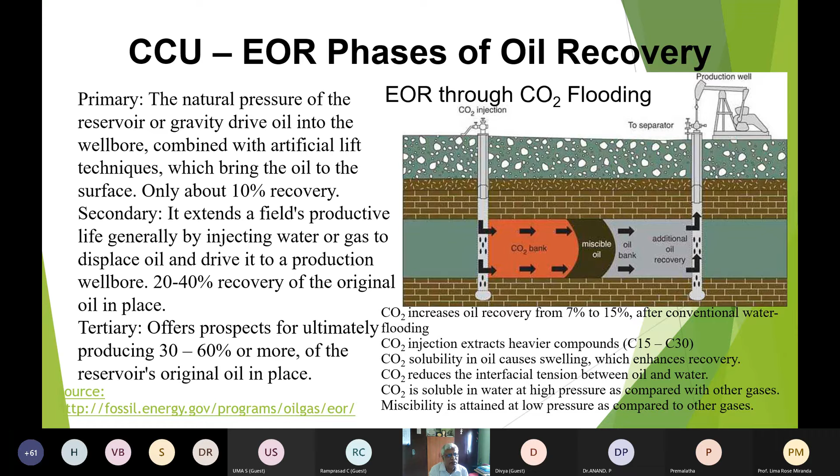I have already discussed this on methane recovery, so I don't want to repeat. It is just by pressure and dissolution you replace methane and get the methane out. For oil, by dissolving, you reduce the viscosity and make the oil come out of the pores. These are all techniques used, and you can read quite a lot now. In future, when you read petroleum technology, you will have to learn more about using CO2 for better enhanced oil recovery.

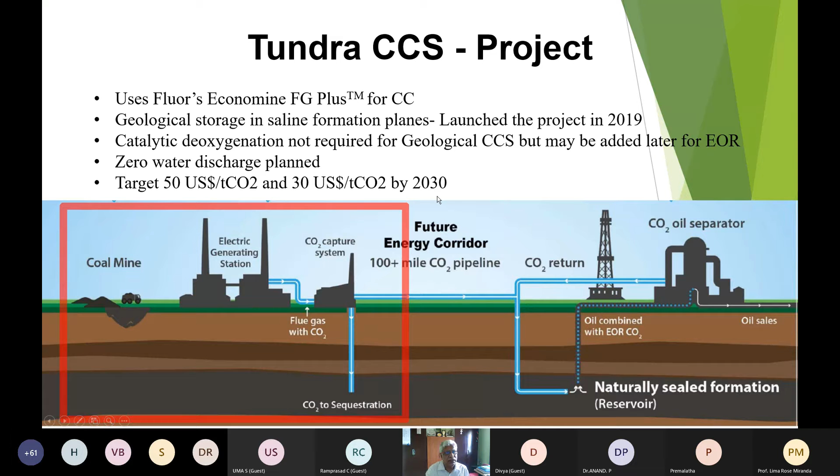I want to come to the last part of it - now, in terms of cost, how expensive they are. They are very expensive. We have seen the cost for recovery, capture first, then transport, then sequestration - all of them cost money. But if you take oil recovery, then you can benefit because you are getting more benefit than cost. Now people are targeting something like $30 to $50 per ton, which is a pretty tough target. Even in India, we are targeting $30 a ton for utilization. But if you get $50, you have done very well.

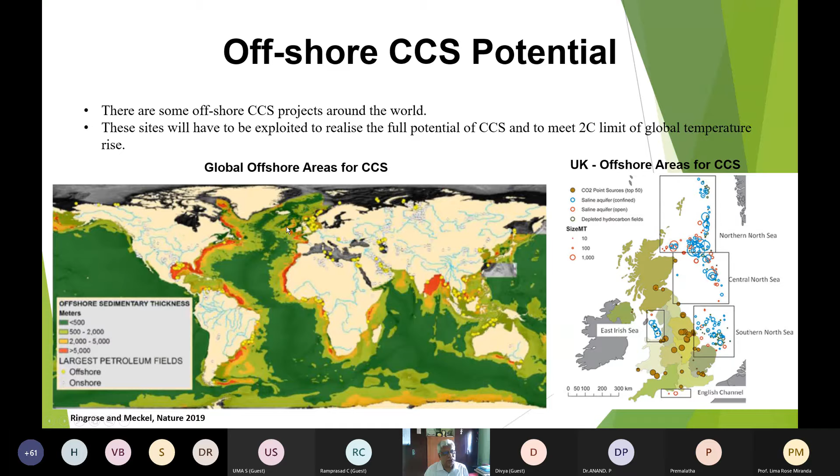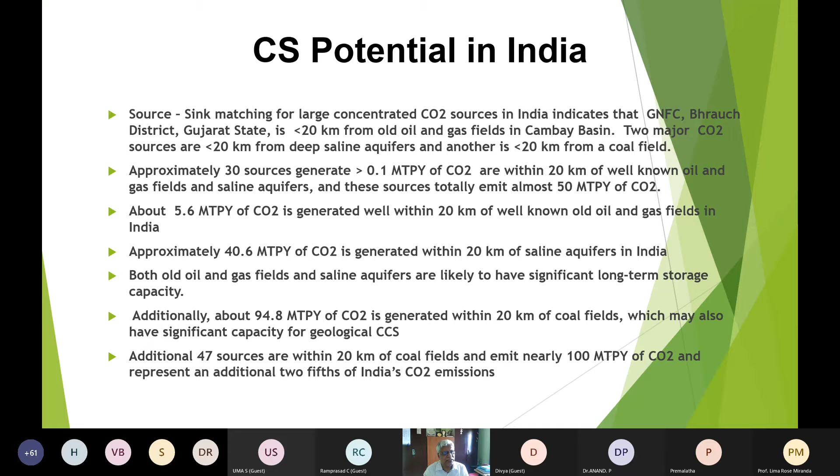I am involved in European review projects on CCU. There are issues in Norway, etc., and we made a study. These are the major CO2 potentials and emitters, mostly from power stations in India, and they can be captured, but still where it can be used, where it can be sequestered, it's quite an issue. If you can do it within 20 kilometers, you can make it a little bit attractive, but sometimes the source and sink are far apart, like 100 kilometers. This is being studied today by DST projects, and mostly in Gujarat there is a lot of potential for CCS.

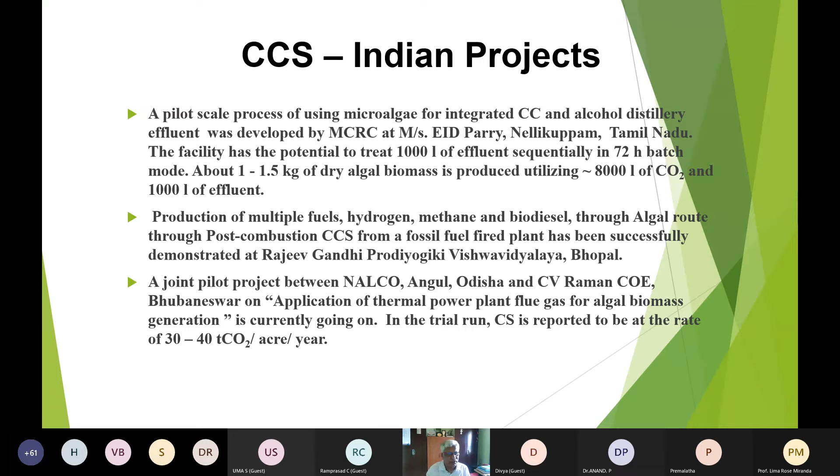There are a few projects, like I told you, the Nellikuppam project for the algal process. Then NALCO has an algal process thermal power plant, which I visited. Then NTPC has a huge project in Talcher. All these projects are happening in India. There is also a lot of research being sponsored - I encourage you to look at the DST website to see where they are sponsoring.

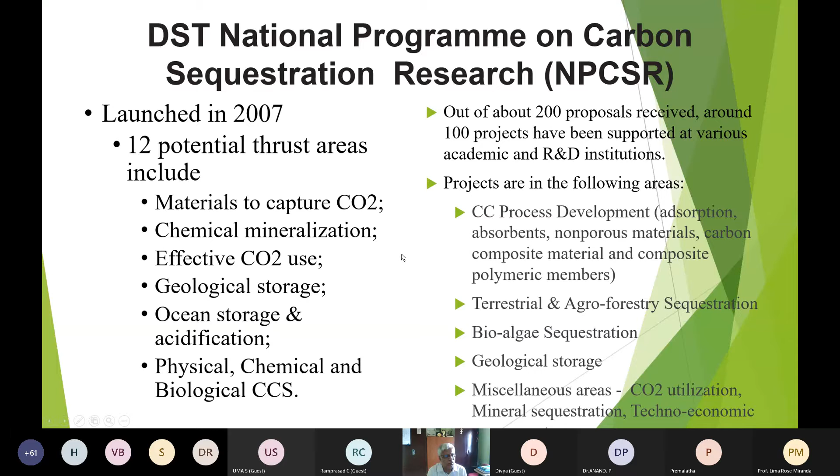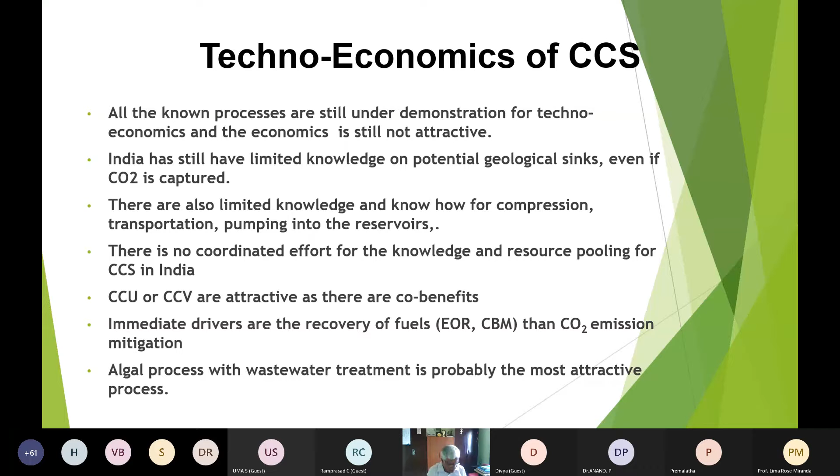Most of them are on materials, but we are now slowing down on materials - we want to move more into valorization. Valorization becomes more important, and it's very difficult for universities to do EOR directly, but you can study the conditions and properties of oil at high pressure in presence of CO2. Similarly, for coal seams and pore definitions and methane desorption, you can do that. The source-sink problem is major, and even industrial partners are not coming in. DST says that if you get industrial partners, you have a potential to do some projects, but still it is an issue to get industrial partners collaborating with IITs, universities, and colleges.

CCS is going to be key for climate change mitigation. It has to be carbon negative, but still we have a long way to go. We have very little activity on CCS, but we have a lot of activity in India on CCUS. DST is funding it - I wish you will be enthused after my lecture to go to DST for funding.